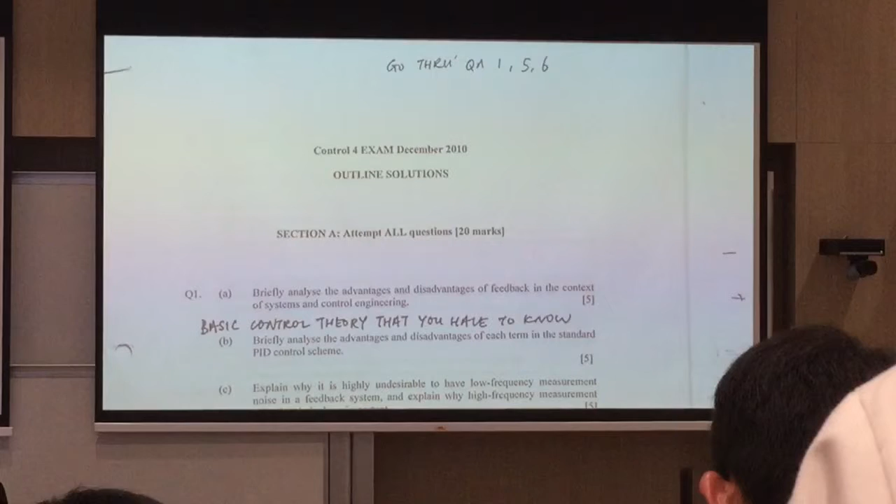Alright, never mind. So for this particular one, which is a sample, I've got questions from some of your friends saying I should go through questions 1, 5, and 6, but others were asking more about questions 2, 3, and 4. As far as you're aware, this course has undergone certain changes since this year, so I'd say 2, 3, and 4 are not really relevant. So ignore 2, 3, and 4.

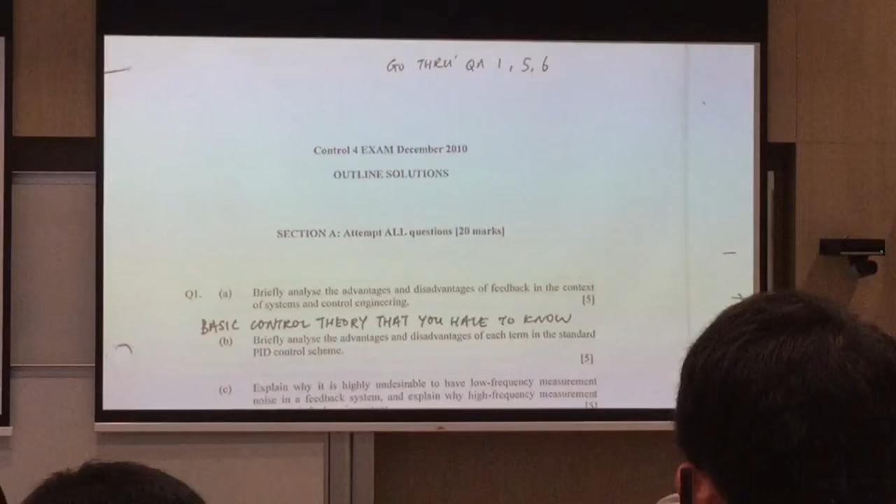So this one, we'll go through questions 1, 5, and 6 because they are still covered in the scope of your course. That's also the reason why it's still included in total — if questions 1, 5, and 6 were also not covered in the scope of the course, we would have left them out. Okay, ready?

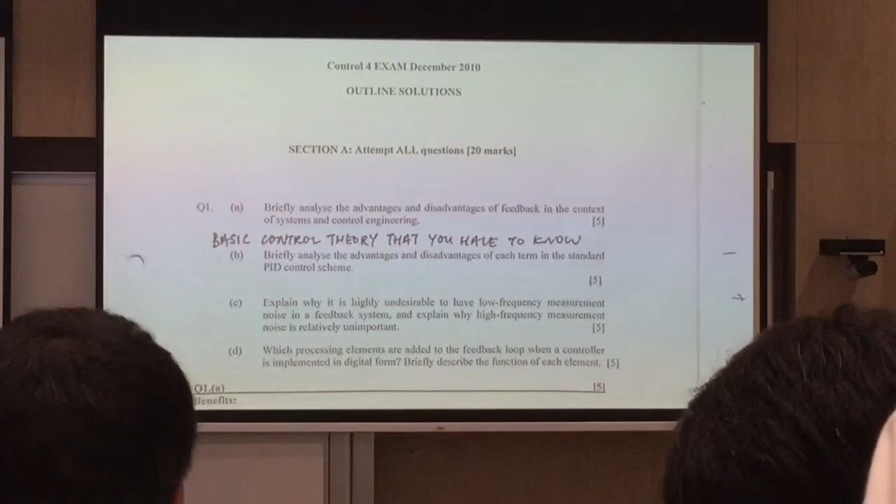Because the solutions are provided, there's no reason for us to spend too much time on it. Okay, question 1: briefly analyze advantages and disadvantages of feedback, in the context of systems and control engineering.

Alright, so this is what you'll get if you've read the notes. It'll say that feedback can help with disturbance rejection and robustness against uncertainty, and so on and so forth. Okay, the answer is there, really no need to go into detail.

For the benefits — I see a lot of chattering. Not interested? Shall we skip it?

Huh? You want to go through this? Oh, because you're giving me feedback that you're not interested, right? So okay, alright, let's move to the disadvantages.

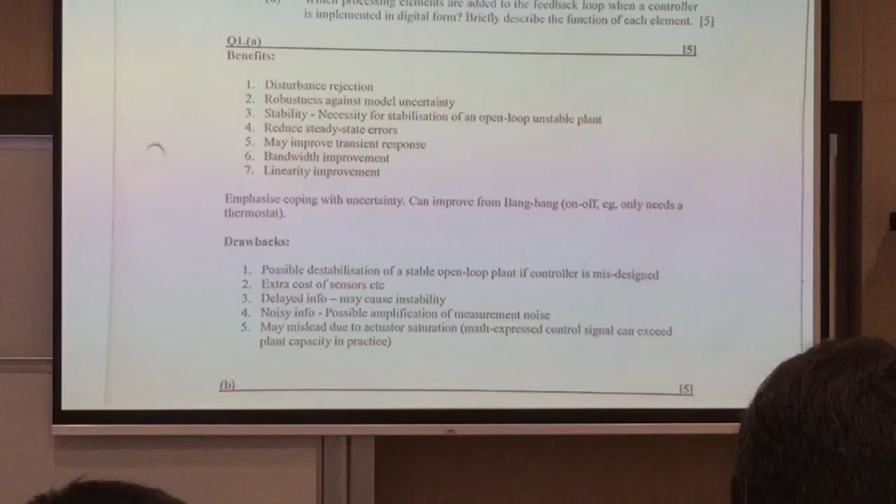Disadvantages — I think it's not really what we put here other than measurement noise, but more like having too high a gain. You may destabilize the system, and you need proper low-noise measurement sensors, etc. So those are the drawbacks.

Okay, part B, which will be more relevant. So I wrote here that question 1 is basic control theory that you have to know. Will this be tested?

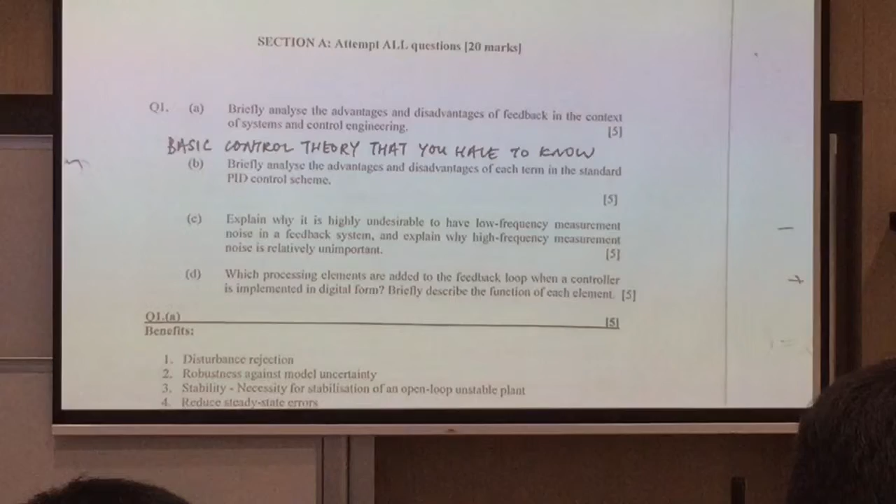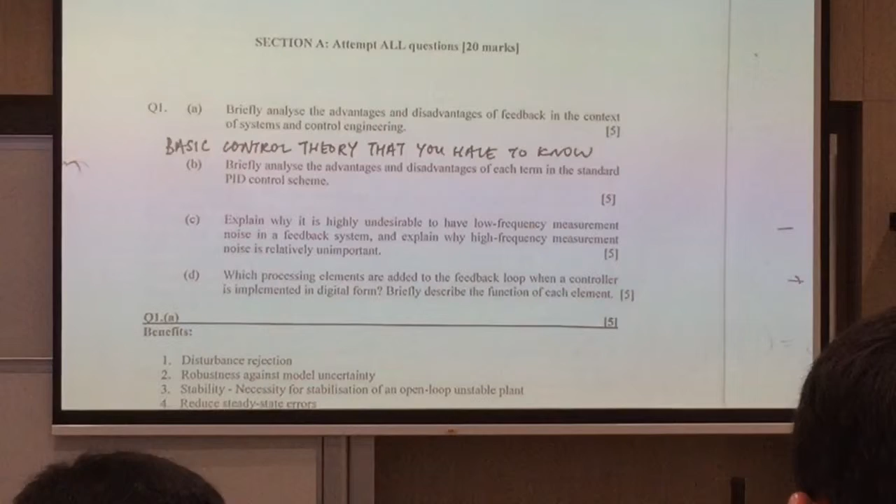Parts D and C, as far as I can remember, were tested in one or two of the past exams. So you still have to know the control theory. As I said, this is a very theoretical matter, it's not all about calculation — there are certain things you have to memorize, especially in the first part of the course.

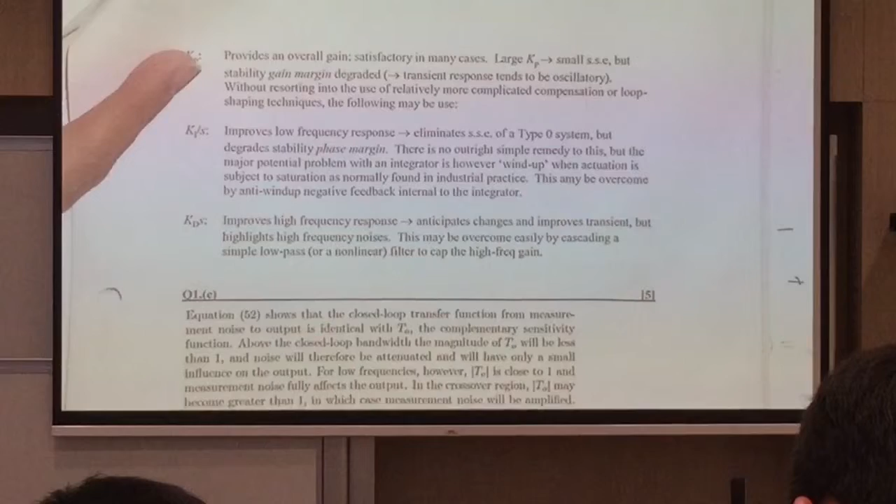So, part B: advantages and disadvantages of each term in the PID control scheme. You have to know there are 3 terms — KP, KI, and KD. KP provides an overall gain. If you have too large a KP, you get a small steady-state error, but the gain margin will be degraded.

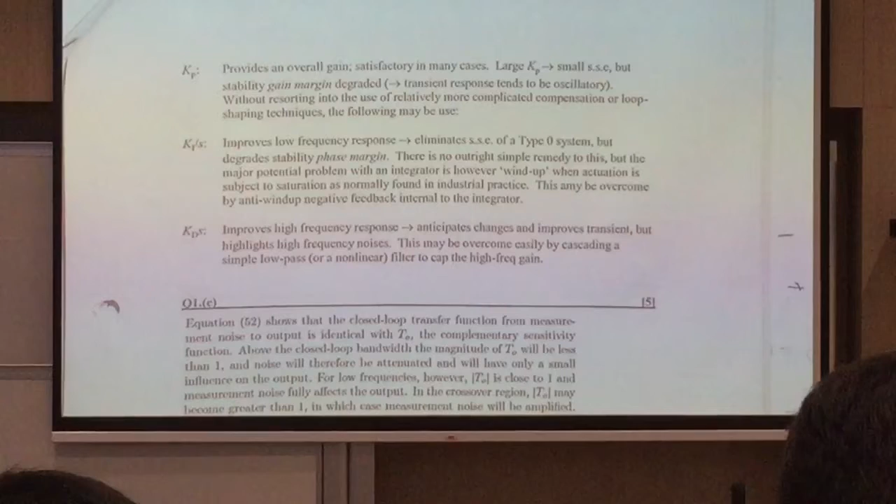Integral gain works on the low frequency response, as we mentioned in lecture, whereas differential gain works on the high frequency response. Integral gain eliminates the steady-state error, bringing it down to 0. But there's a problem with integration — it may end up causing the system to go into saturation, rendering it useless.

Part C: Why is it highly undesirable to have low frequency measurement noise in a feedback system, and why is high frequency measurement noise relatively unimportant? This relates to your sensitivity functions.

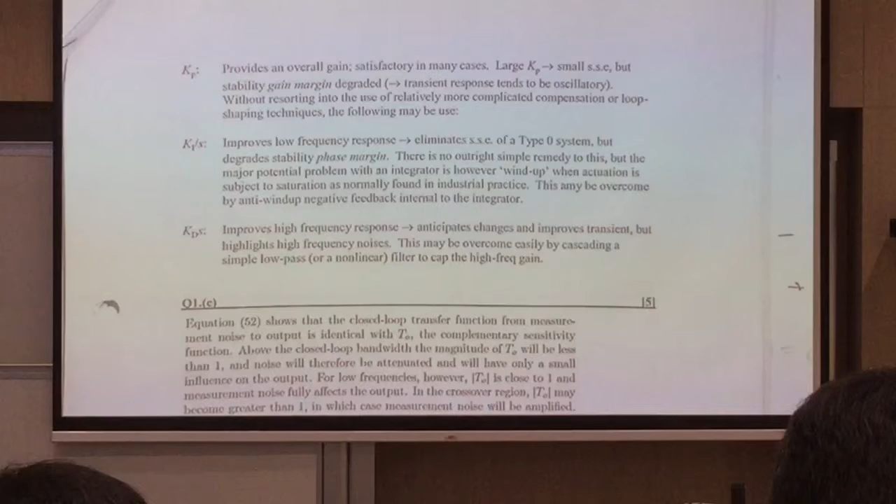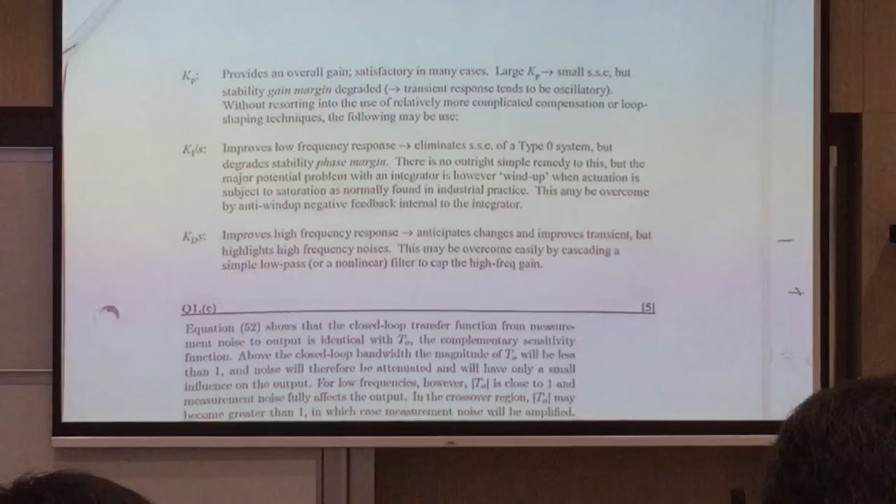So what is the coefficient tied to measurement noise in the output? T, right — the complementary sensitivity. The answer says the closed-loop transfer function from measurement noise to output is T, the complementary sensitivity function.

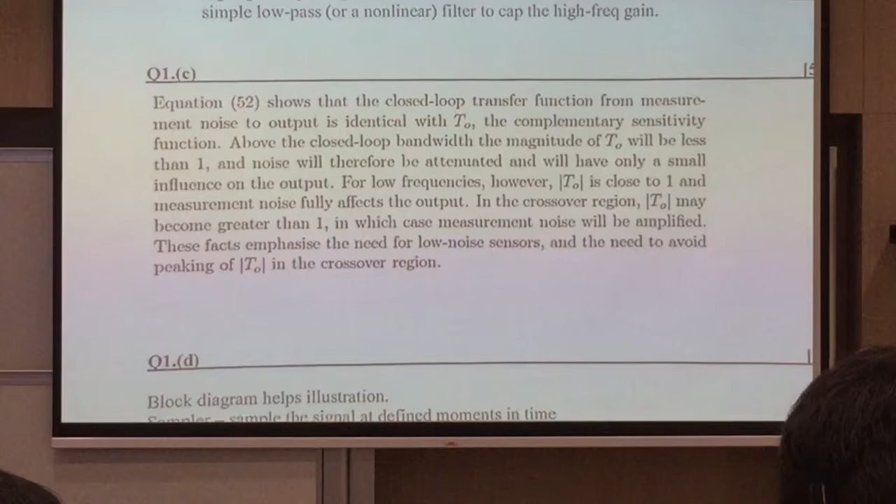If we draw the graph, T starts from 1 at the beginning and goes to 0. So at low frequency, if you have measurement noise, it's multiplied by 1 and reflected in the output. But at high frequencies, the noise is attenuated, so it doesn't reflect on the output. That's why for low frequency, T is close to 1, and measurement noise will reflect in the output.

What about crossover? In the crossover region, if T is greater than 1, you will amplify measurement noise, further emphasizing the need for low noise sensors. This is quite a model question, and this is the model answer.

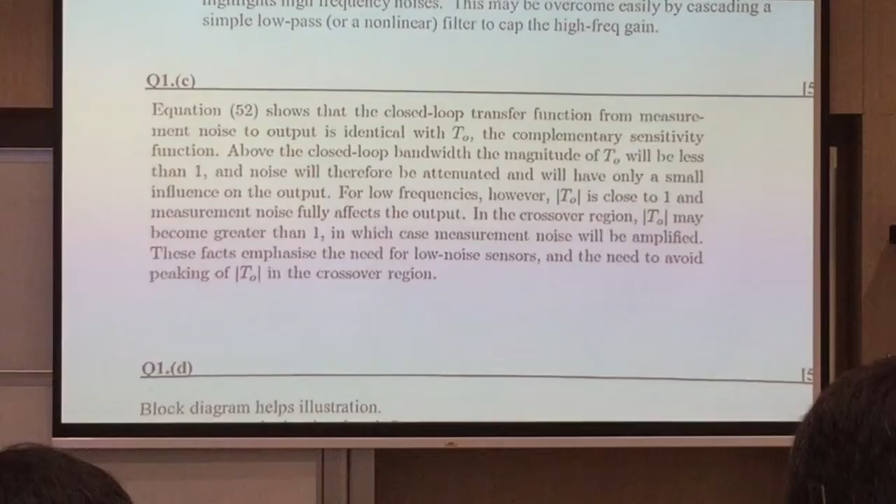Part D: which processing elements are added to the feedback loop when the controller is implemented in digital form? This isn't quite relevant — that portion is more for digital control, so I'm not going to go through this. Okay, that's all for question 1.

Please don't come and ask me about questions 2, 3, and 4. Alright, okay, question 5.

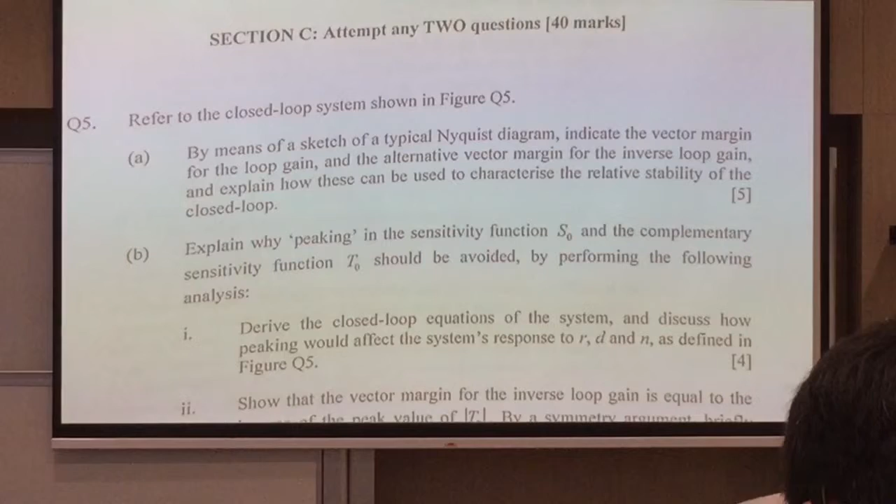Okay, question 5 is a very typical question that we often say. Very typical question, right?

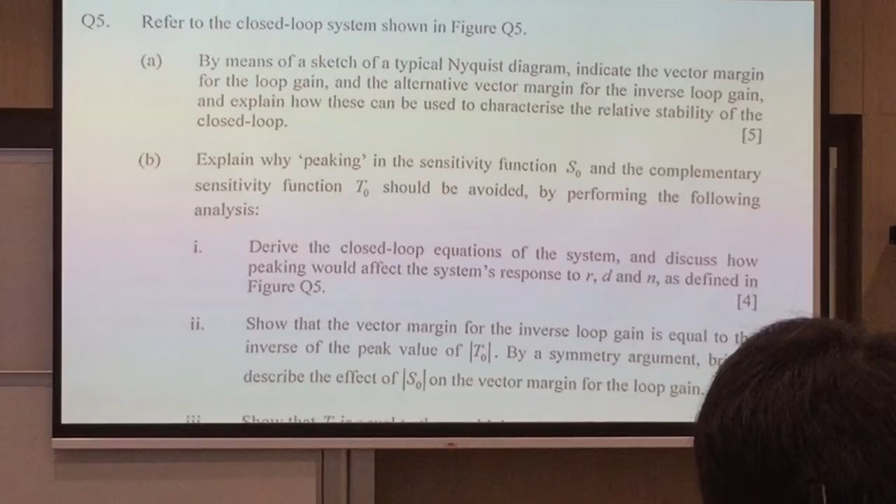Because this diagram, this is what we always draw. We ask for loop gain, so you must tell me that this is L, J omega. We ask you to indicate the vector margin.

A lot of these things are extra. So we're asking for the vector margin. So you draw, right now it's -1 and the nearest point. The distance between -1 and nearest point, tell me that's vector margin.

And then inverse loop gain, so you're supposed to draw, which is not here, but in your solution, you're supposed to draw 1 over L. Inverse loop gain, right? Loop gain is L, J omega. So inverse loop gain, 1 over L. But we don't draw it here, right? But in the exam, you're supposed to draw.

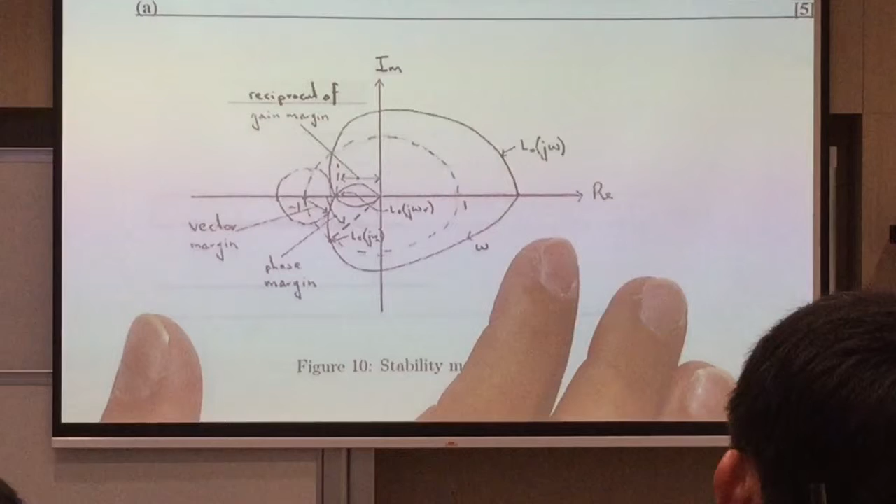So don't just see the answer and then memorize the answer and then think that if I'm going to draw this, I get 2 marks. You didn't get half the mark, because this is not a perfect answer. You answer according to the question, you don't answer according to the solution. So this is what I'm going to tell you.

The question asks for the inverse loop gain. So in your notes, what does the inverse loop gain look like? The shape of a fish. So if you don't know what it looks like, go to your notes. Go to draw a fish.

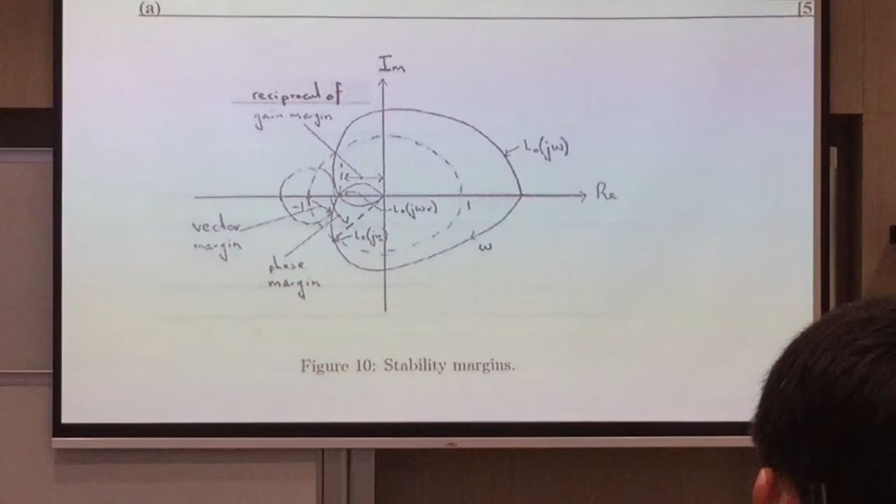And the same thing, indicate the alternative vector margin. So this is RM. For the loop gain, the vector margin is SM. So next figure, you're supposed to draw the inverse, 1 over L, which is shaped like a fish. And you mark from -1 to that 1 over L, and then mark RM. Is that clear? And then explain how this can be used to characterize relative stability of the closed loop.

Sometimes, depending on the question, this solution is not perfect, because this solution is not answering the question. But it's quite obvious without me telling you that this solution is not answering the question. The question didn't ask you for gain margin, it didn't ask you for phase margin. It didn't ask you for the definition of phase and gain margins. So this solution is not answering the question. Please don't just memorize the solution.

That's straightforward. But then, of course, this solution is, if the question has asked you to draw a Nyquist diagram illustrating the gain, the stability margins, and then provide the definition of the stability margins and how they can be used to characterize closed-loop stability, then this is the solution.

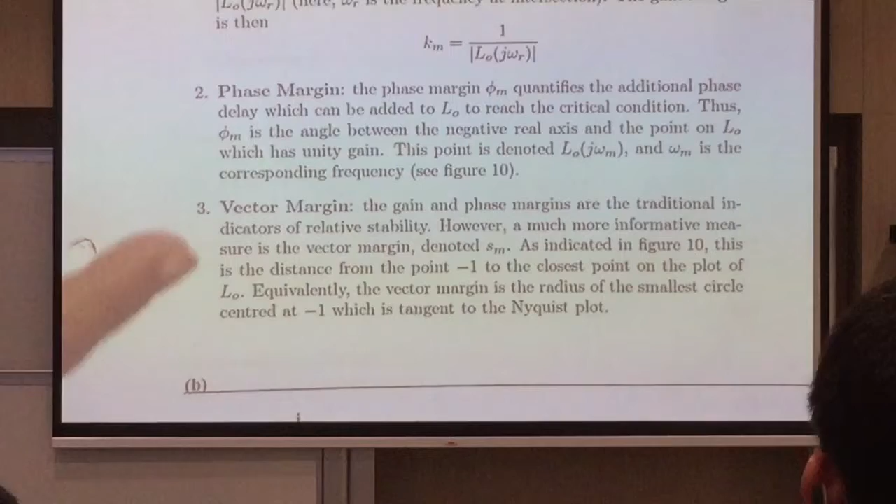So what you're supposed to answer for this is how that can be used to characterize relative stability of closed loop for the vector margin, because they always ask you about vector margin, right? So when you write this part, you say the more informative measure is the vector margin SM, which is the distance from -1 to the closest point to L naught.

And you say that the inverse vector margin RM is the distance from the point -1 to the closest point on plot of 1 over L naught. So that's the answer to this question. Okay, move on, part B.

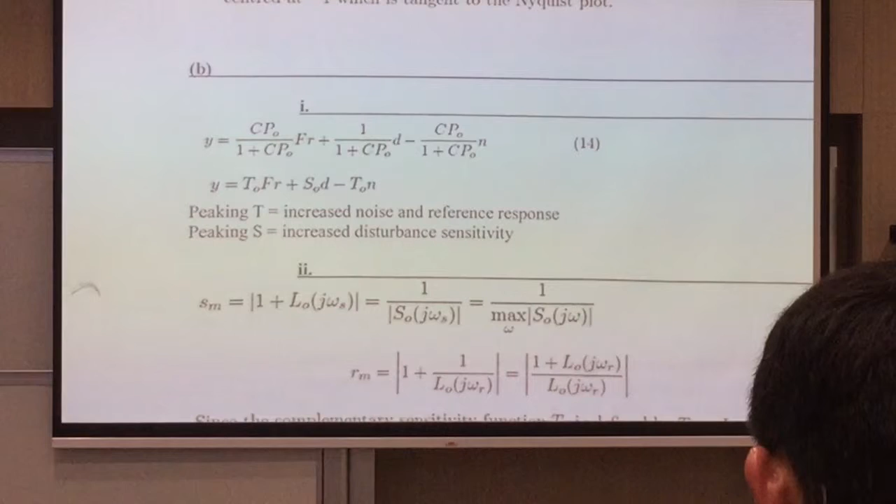Explain why peaking in the sensitivity function S0 and complementary sensitivity function T0 should be avoided by performing the following analysis. Many of you, the minute you read this sentence, jump into explaining why S and T is important and why you want to start peaking and blah blah blah.

But is that the question? Is that the question? The answer is no, this is not the question. Explain why peaking in S0 and T0 should be avoided, it's not the question. You're just supposed to read that. It's just a guidance.

So what you need to do is by performing the following analysis, so the question is in part 1, 2, 3, because these are the sections that are awarded marks. There's no mark here.

Understand this? Okay, so this is English, how you read English. There's no mark here, so you don't have to answer this. You answer part 1, 2, and 3 because there are marks there.

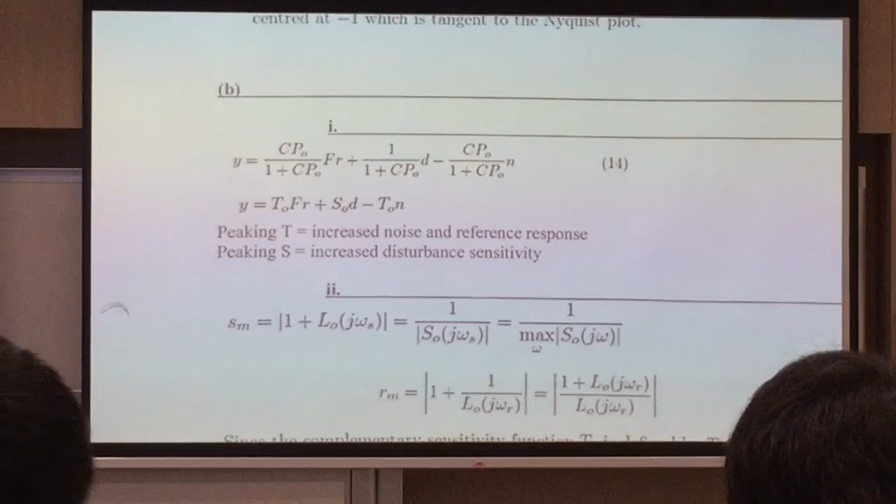This has been tested before, and students were asked why you want to avoid peaking in T and S, why it is important, and to draw all the graphs. But you're not being asked for that here, right? So there are no marks for that. Nothing. Alright, so you should go to part 1, whereby you have 4 marks. So this is where the marks are. Is that clear? Okay, because I don't want to go through the motion of explaining why you did this and that. Why? Waste of ink.

Part 1: derive the closed loop equation of the system. Okay, so basically you write down what is Y equals to, how much is R, how much is D, and how much is N. This is a very important equation, so you should probably memorize it. And discuss how peaking will affect the system's response to R, D, and N as defined in the question.

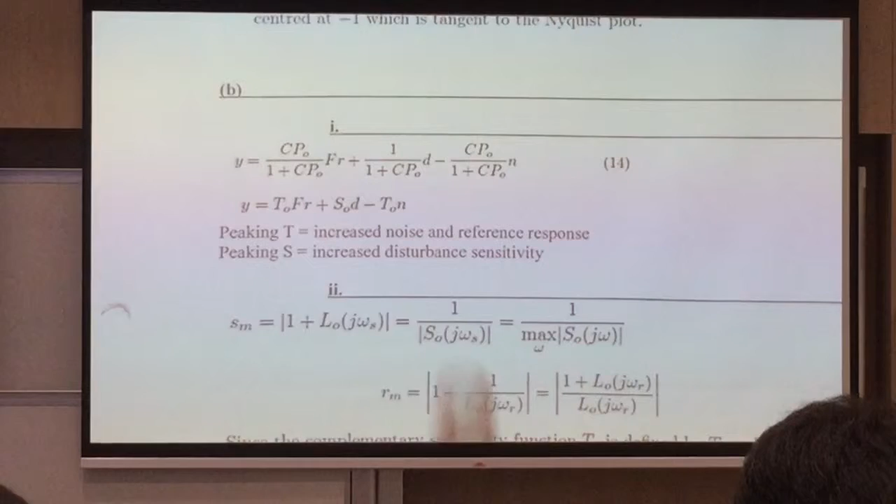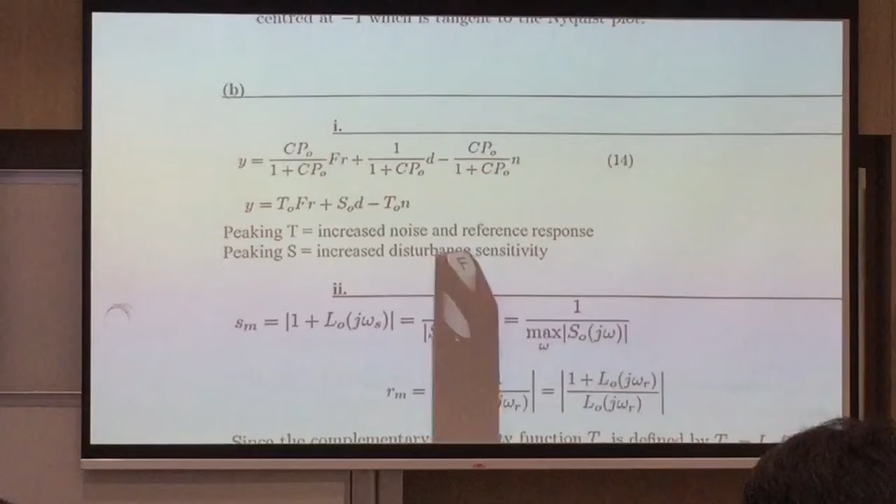So first thing, you write down this equation. Alright, and tell me that this is T, this is F, this is T, so write down this again. And then we'll discuss how peaking will affect the response. So if you are peaking in T, that increases noise and reference response. Peaking in S will increase the disturbance sensitivity. Okay, and then you get 1 mark. Easy to see, marks are awarded 1, 2, 3, 4.

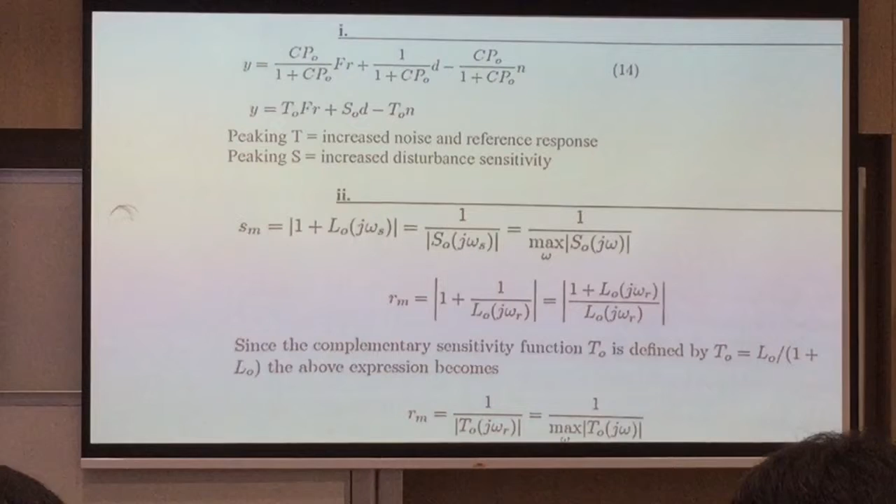Part 2 shows that the vector margin for the inverse loop is equal to the inverse, the peak value of T naught. So basically, show that Rm is equal to 1 over max of T, which we have gone through in the lecture. So if you have taken down notes, you can show that. Okay, that's your problem.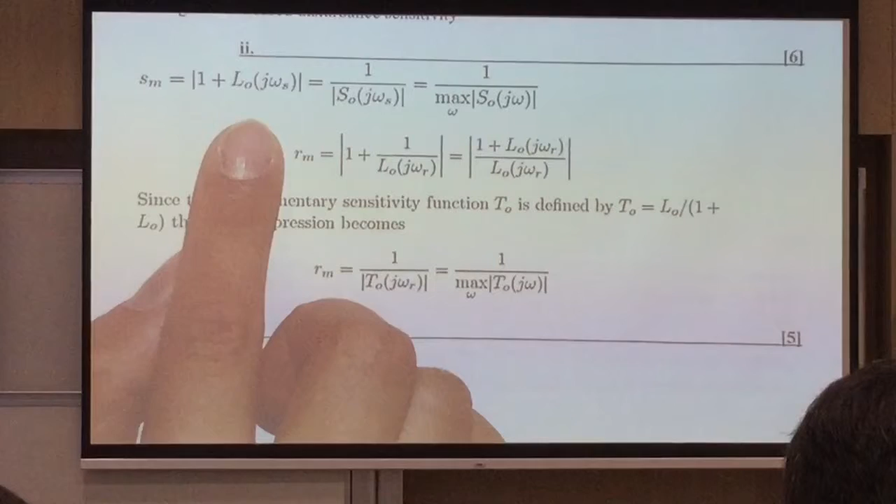This defines Sm. Sm, the vector margin, is the distance from -1 to the nearest point of L naught. So, distance from -1 to the nearest point of L naught is this: magnitude of 1 plus L naught, at J omega s, where omega s is the frequency point at the nearest point. So you can write this: this is 1 plus Cp. L naught is Cp, and S naught is 1 over 1 plus Cp. Correct? So 1 plus Cp will be 1 over S naught. You got that?

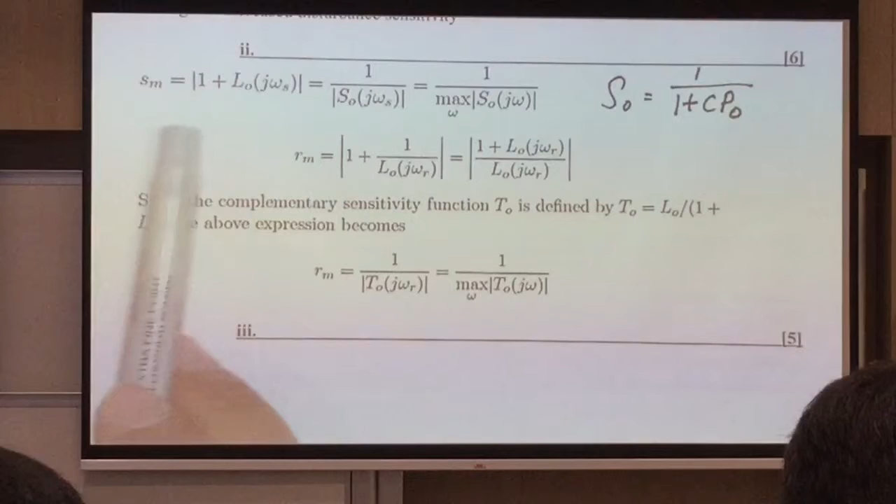S naught is 1 over 1 plus Cp naught, and the definition of Sm is 1 plus Cp naught, so this is 1 over S naught. Got that? And because Sm is the minimum distance, the shortest distance, the closest distance, if you want minimum of Sm, your denominator will be maximum. So this is 1 over max for the particular frequency.

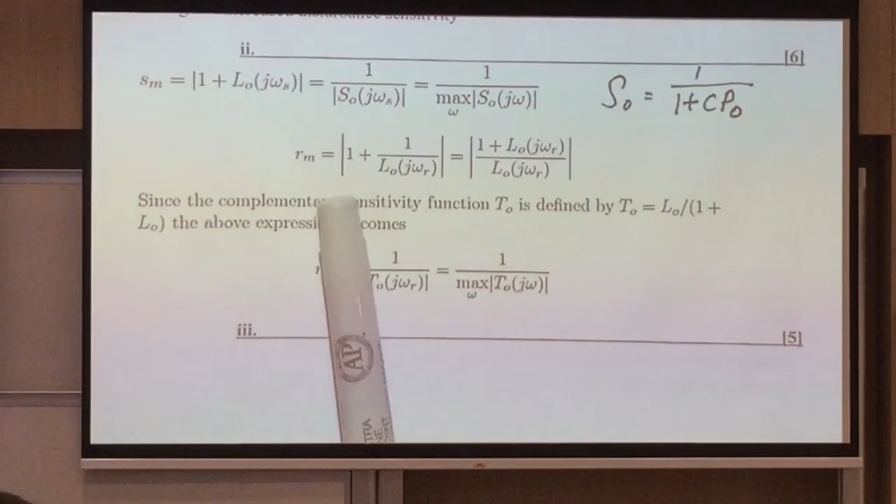Alright, then you move on to Rm. Rm is the distance between -1 and the inverse loop gain, the closest distance between -1 and 1 over L naught. So this magnitude defines distance. And if you work it out, it's 1 plus L naught over L naught. And the definition of T naught is Cp naught over 1 plus Cp naught. So you can see easily that this is the reciprocal of T naught, so this is 1 over T naught.

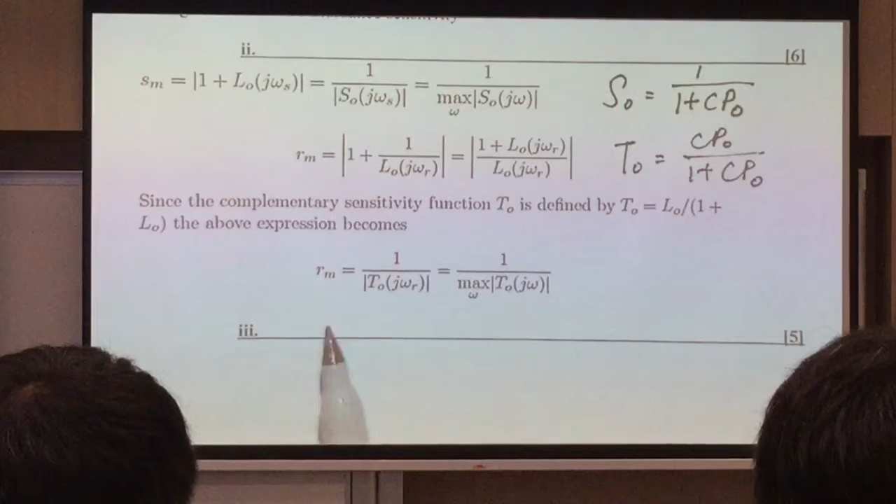So Rm is 1 over magnitude of T naught. Similarly, Rm is the closest distance from -1 to 1 over L naught, so closest meaning minimum. So how do you get minimum of Rm? You get the minimum of Rm from the maximum of the denominator, right? So Rm is 1 over max magnitude of T. And that's all, 6 marks. Easier. Easy? Okay. Part 3.

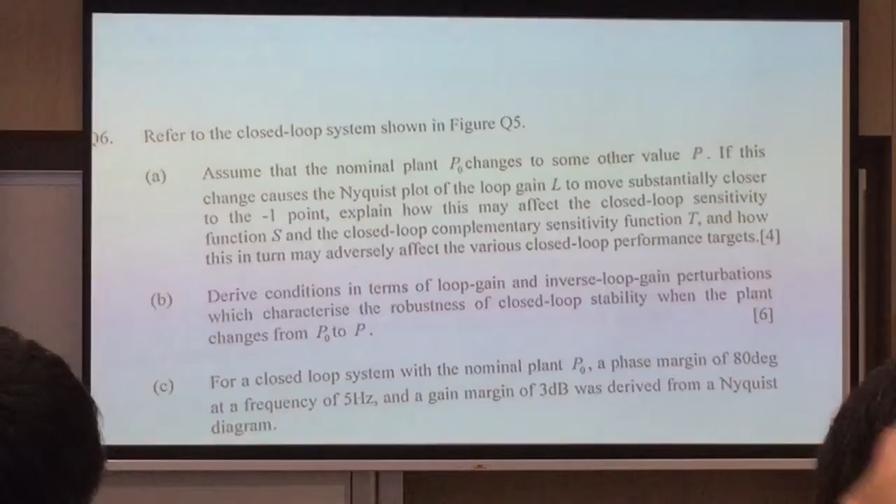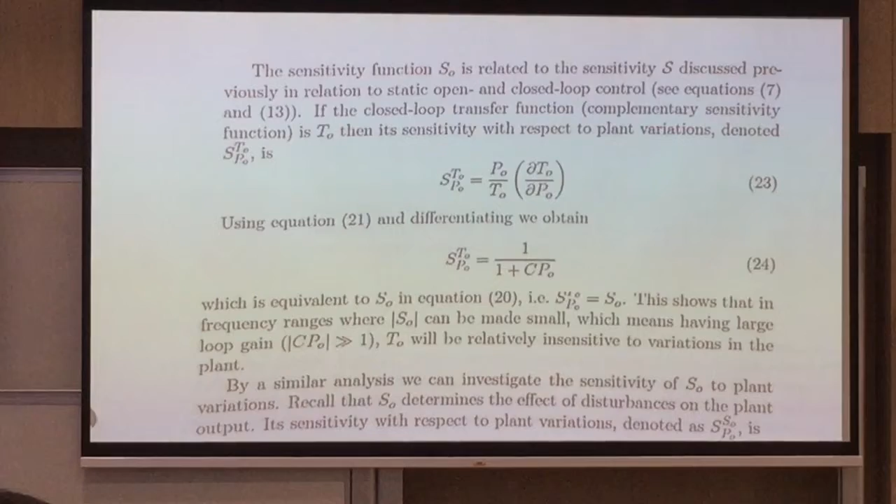Show that delta S naught over delta P naught is T naught, which is something that we have done. Okay, so basically, just write down this, which is over here, right?

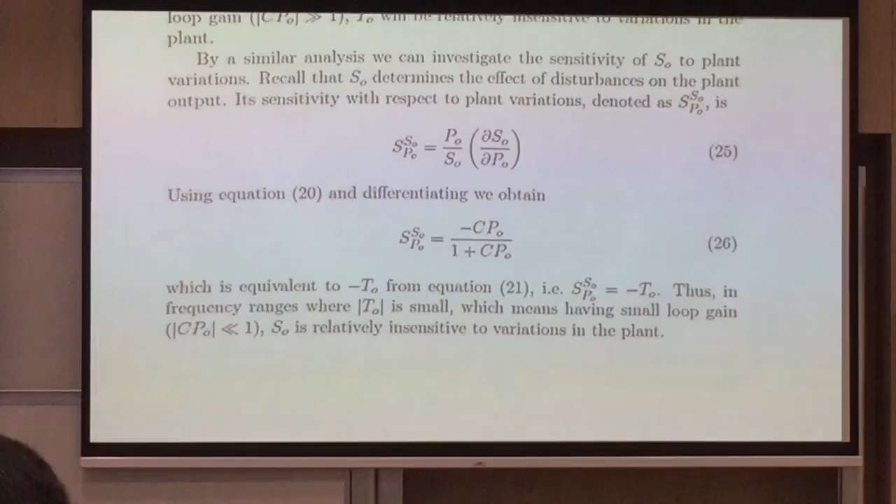This one, okay, so sensitivity of S naught to plant variation. If you read this, the solution is inverse to this question. So the first part of the question says show that T naught is equal to sensitivity of S naught to changes of plant. The answer is here at the bottom, answering the first part of the question.

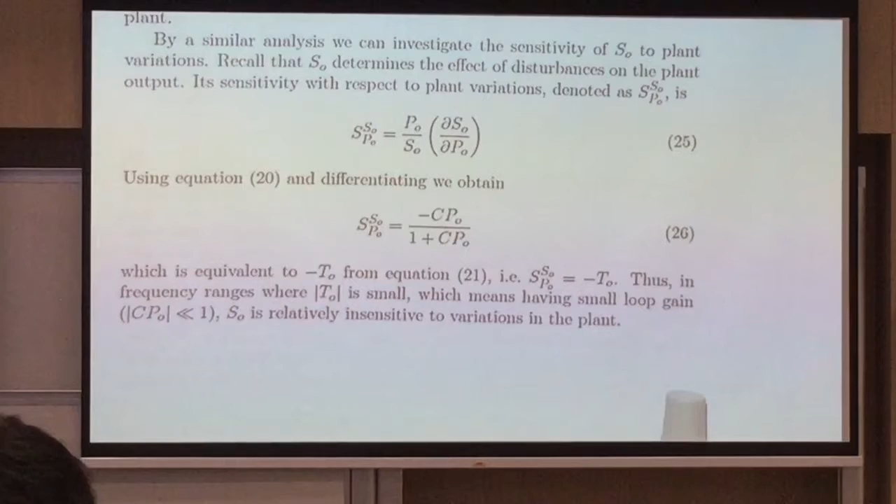This is answering the second part of the question. So don't just memorize the solution. What I'm supposed to write is here for the first part of the question. So you want to investigate sensitivity of S naught to plant variation.

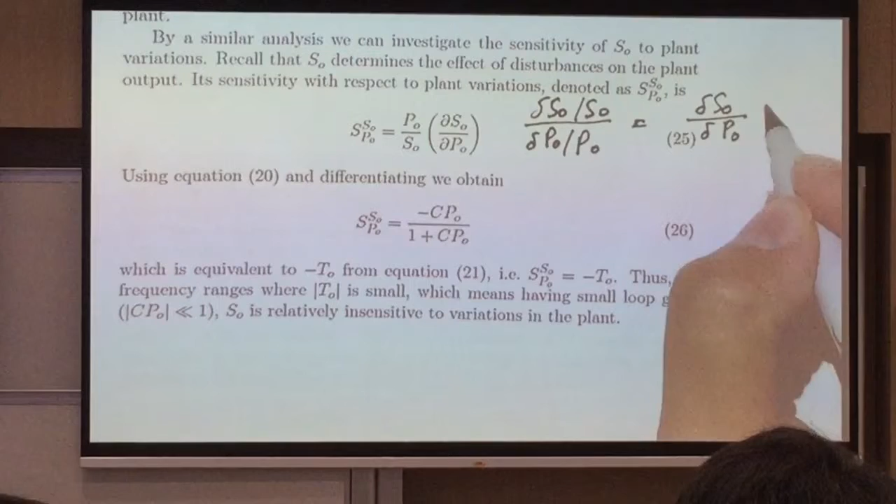So what you do is delta S naught over delta P naught. How do you get this? You're supposed to do delta S naught over S naught, and then delta P naught over P naught. So this is delta S naught over delta P naught times P naught over S naught. Okay? Yes? Right? Yeah?

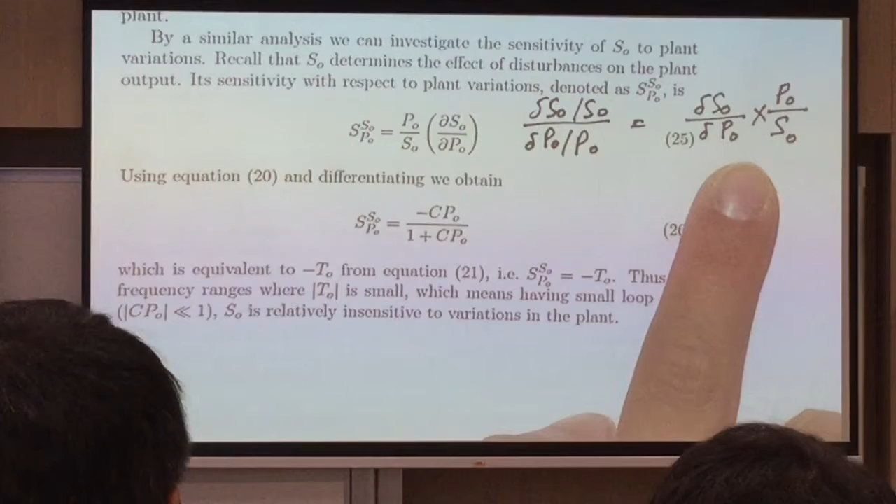Okay, and then if you do this, you work out with this. We have gone through it in the lecture and the tutorial, so I'm not going to go through it again. And show that this is minus CP naught over 1 plus CP naught. You tell me that it's minus CP naught over 1 plus CP naught, if those of you write this.

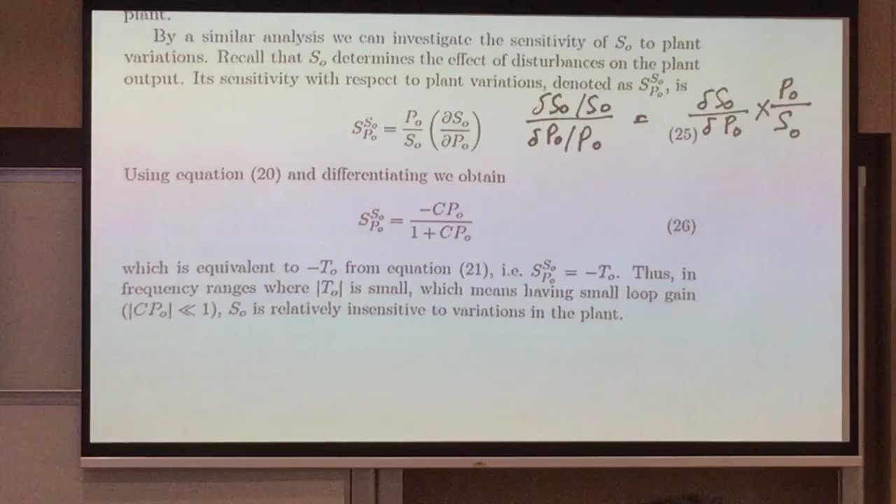You write this, and then you immediately equal it to minus T naught - do you deserve any marks? No, no. Answer is no. You only get 1 mark if you write down this one. But if you write down that this is equal to minus T naught directly, then you don't get any marks at the bottom, alright? You understand?

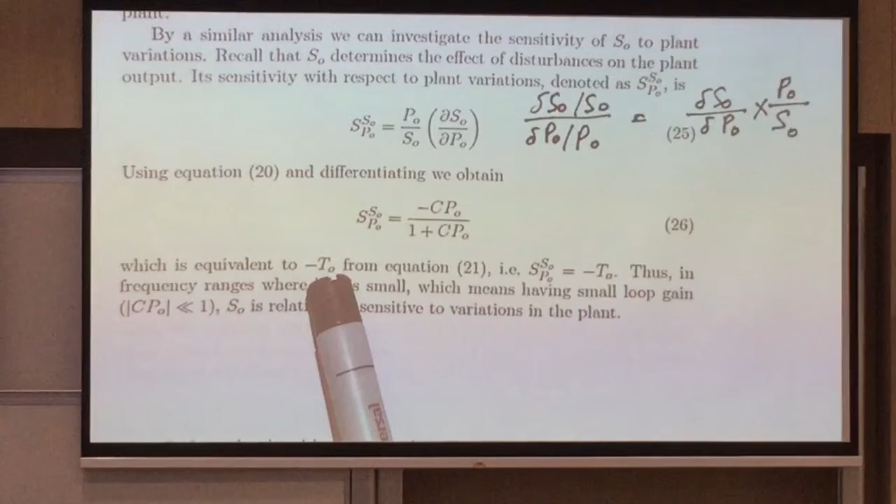You must tell me that this is minus CP naught over 1 plus CP naught, because effectively, if you differentiate, you get everything in C and P, you don't get things in T. You must show me the intermediate steps that lead here and then it equals minus T naught. If you immediately write down this equals minus T naught, I'm sorry. Alright.

Then this part of the solution says in the frequency ranges where T naught is small, which means you have a small gain, S naught is relatively insensitive to variations in the plant. This is something you write if you're asked for it, but in this question you weren't really asked for it. But if you write this, it completes the solution.

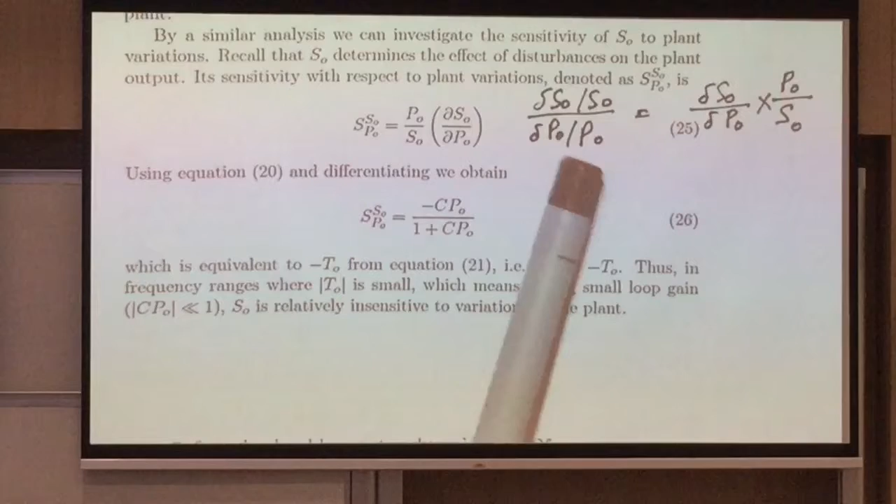So our question would be explain what does it mean in terms of sensitivity analysis. If this is minus T naught, then when T naught is small, in the region, in the frequency range where T naught is small, S naught is relatively insensitive to variations in the plant, because delta S over delta P naught is small. So changes in the plant don't affect S naught.

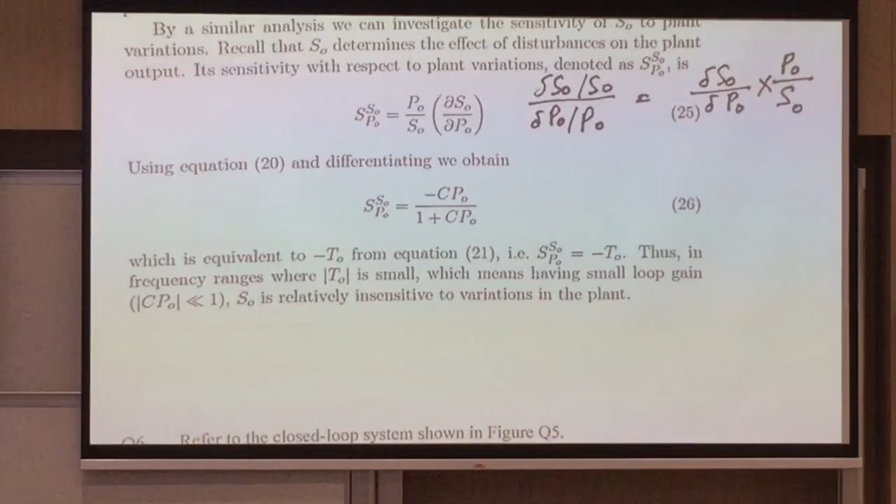Okay, you got that? The next part of the question: by the symmetry argument, describe the effect of S naught on the sensitivity of T naught. So the answer is on top. Instead, you do delta T naught over T naught over delta P naught over P naught. Then you go with delta T naught over delta P naught times P naught over T naught.

Okay, and then you show that this is 1 over 1 plus CP naught, which is equal to S naught. And this says that in frequency ranges when S naught is small, T naught is relatively insensitive to variations of the plant.

So don't just memorize the solution, because that's not answering the question. Okay, alright.

5 plus 6 is 11, plus 4 is 15, plus 5 is 20 marks. Can you score 4 marks? You should have. Otherwise, it's difficult to get an A. You don't score 4 marks, at least for my section.

Okay, we move on to question 6.

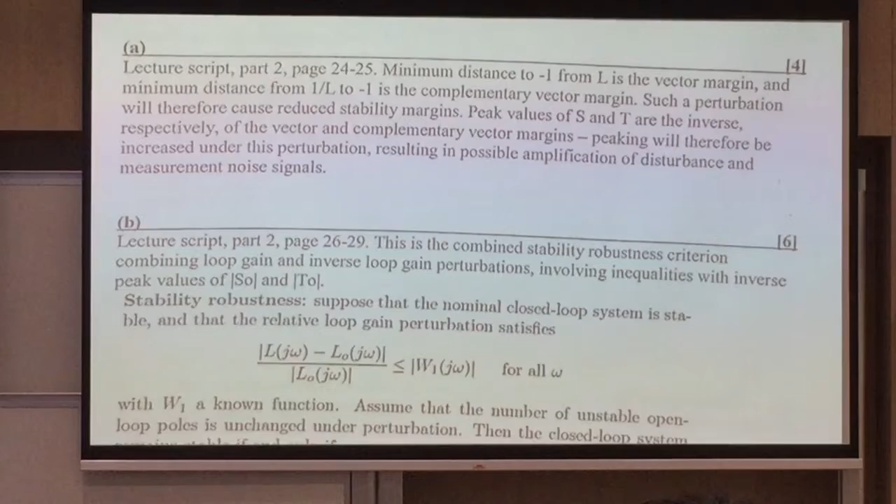Assume that the nominal plant P naught changes to some other value. So there's been a change in the plant. Basically, you change the loop gain from L naught to L. If this change causes the Nyquist plot of the loop gain L naught to move to L, which is closer to the -1 point, explain how this may affect the closed loop sensitivity function S and T, and how this in turn may adversely affect the various performance targets.

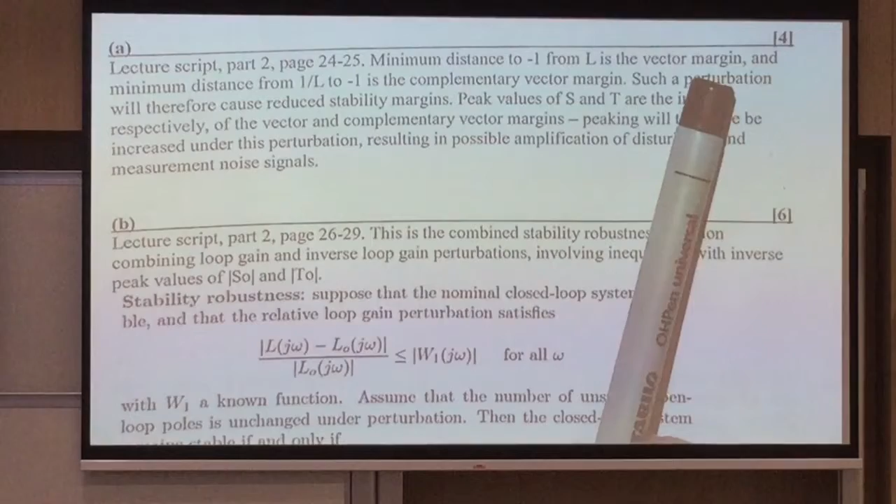So basically it's telling you that L naught has changed to L. How does that affect S and T? When L naught has changed to L, your minimum distance to -1 from L is called the vector margin. And the minimum distance from 1 over L to -1 is the complementary vector margin, so there's SM and RM. So if your L naught has changed to L, SM and RM will be reduced.

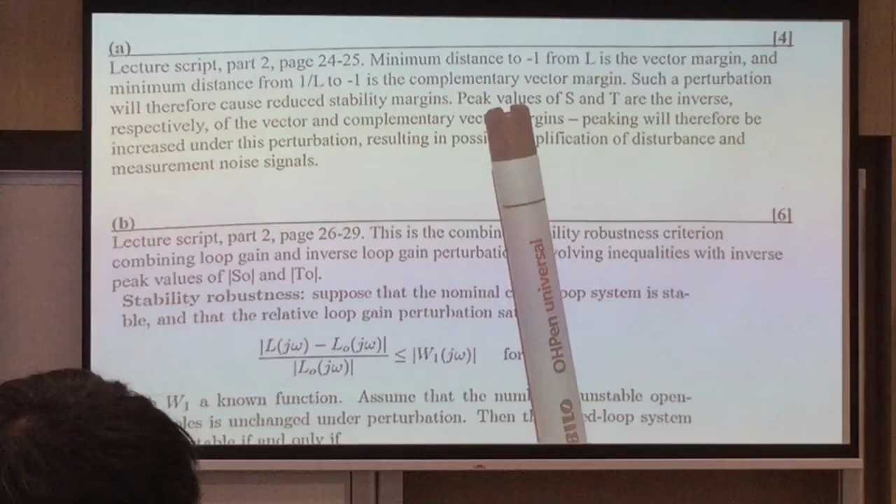And because SM is 1 over max of S naught, and RM is 1 over max of T naught, the peak values of S and T are the inverse of SM and RM. So peaking will then be increased under this perturbation, because if SM and RM are reduced when L naught has changed to L, SM and RM are reduced.

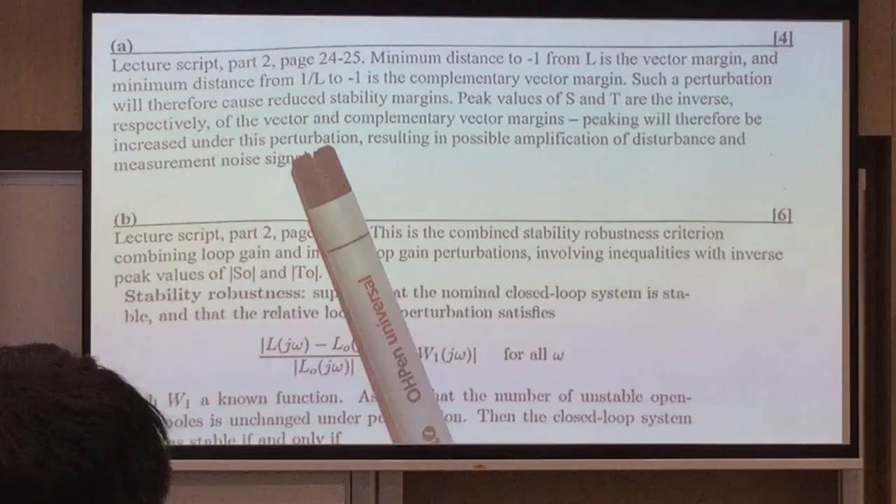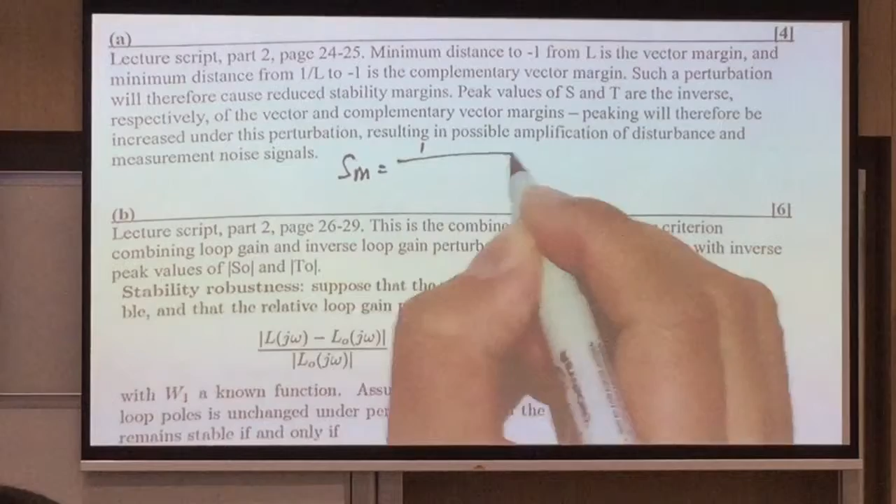So SM is 1 over max of S naught, and RM is 1 over max of T naught. So this question says that L naught has changed to L. And because SM is 1 over max of this, L naught changed to L, SM reduced, RM reduced.

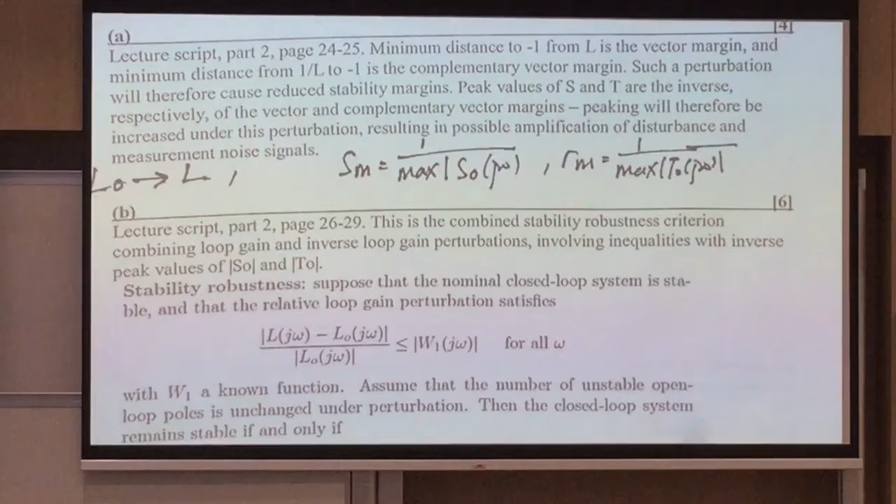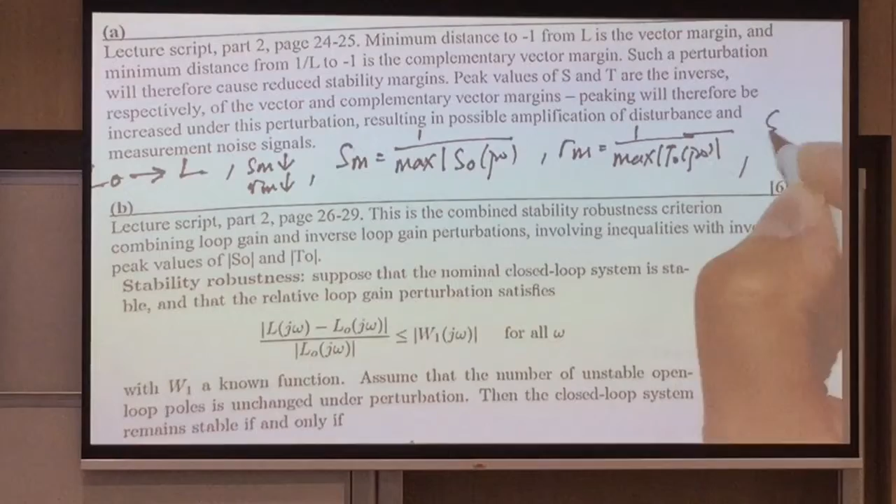SM reduced, RM reduced. SM is 1 over max of this, RM is 1 over max of this. So that's peaking, because this is lower, so this is bigger. This is lower, this is bigger, right? So it tells you that S naught and T naught increase. Yes, so that's peaking.

So there's amplification in disturbance and measurement noise. Make sense? Straightforward, it's just one line like that, but of course this is not what you write for the solution. You write in full complete sentences. You can write the equation and explain why. That's 4 marks - you'll definitely get some marks for it, not all 4 marks. Understand?

Part B. Derive conditions in terms of loop gain and inverse loop gain perturbations, which characterize the robustness of the closed loop stability when the plant changes from P naught to P.

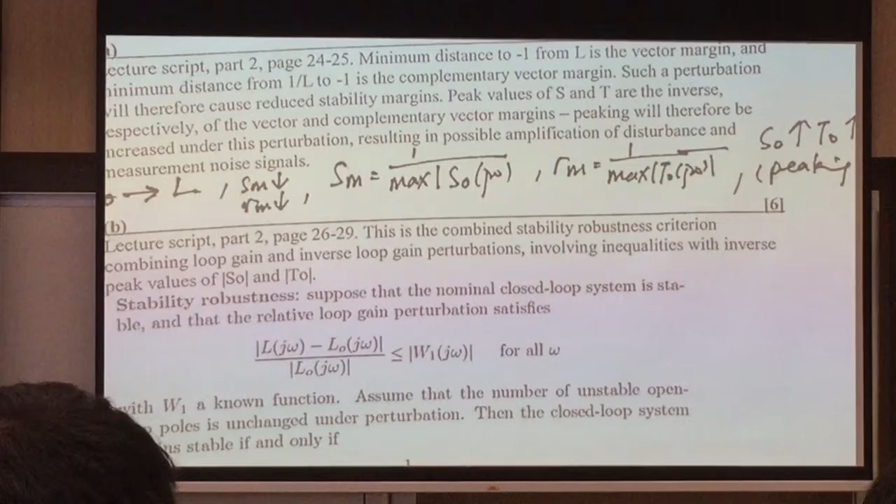Derive conditions - so sometimes we may ask you to derive conditions in terms of loop gain and inverse loop gain perturbation, meaning when L naught has changed to L, and when 1 over L naught has changed to 1 over L. So the question says when L naught has changed to L, and when 1 over L naught has changed to 1 over L. This means there's a perturbation in the loop gain and the inverse loop gain.

Derive conditions that characterize robustness. So derive conditions that characterize robustness - in your lecture, what did you derive that characterizes robustness? Robustness analysis - there's only one criterion here, right? The Doyle's stability criterion.

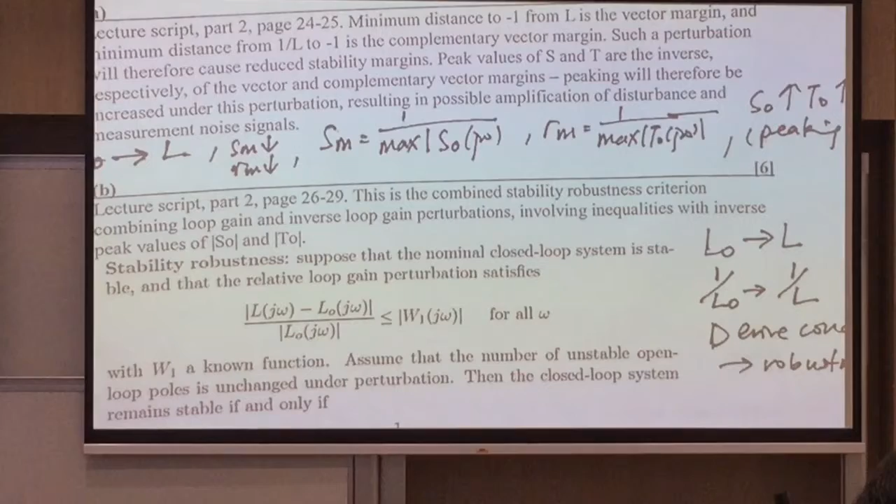So when you read the question, obviously you don't understand it at first, but you need to try to understand it. What the question is asking for is loop gain and inverse loop gain perturbations - meaning if L naught has changed to L and 1 over L naught has changed to 1 over L, derive conditions for robustness. I'm sure many of you, when you read the question, don't understand it, but if you look at this, you understand it. I hope you understand it. So for the robustness condition, there's only one criterion that you have learned in the whole of this course - that's called Doyle's stability criterion.

So part B is asking for Doyle's stability criterion. All you need to do is write down the entire criterion, and that's 6 marks. Sometimes we will ask you to derive necessary and sufficient conditions - same thing, still the Doyle's stability criterion. As long as you see that we mention loop gain and inverse loop gain perturbation, derive necessary and sufficient conditions, and we mention robustness when the plant changes from P naught to P, give us the Doyle's stability criterion. Is that clear?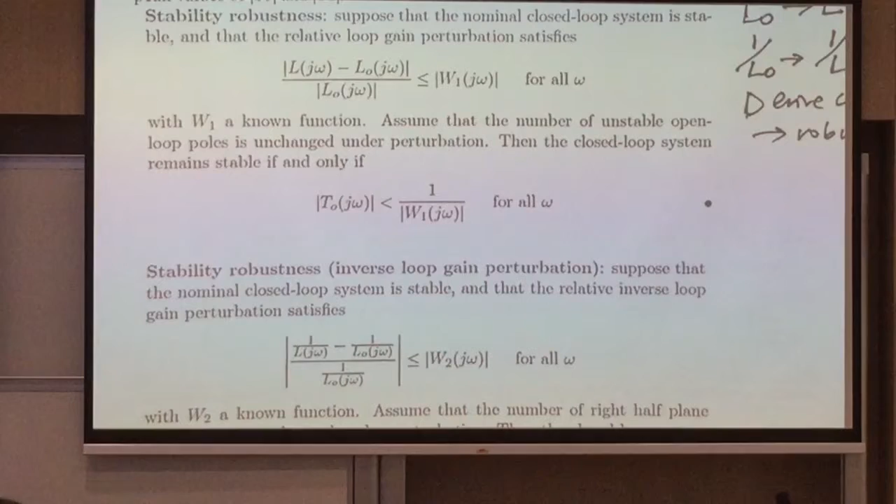Okay, so what is Doyle's stability criterion? Alright, just answer the question. If there's a perturbation from L naught to L, by Doyle's stability criterion, L minus L naught over L naught must be less than or equals to... okay, you wouldn't write W1 immediately.

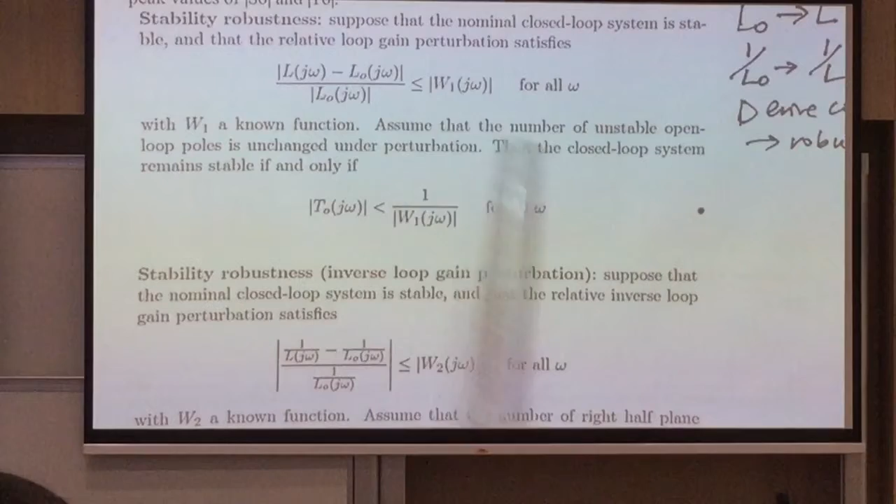Any questions over here?

Okay, so as I said, this is a very theoretical module. There are 3 parts of this module. The first is sensitivity functions and how they relate to stability margins. The second part of this module is on PID controllers and pole placement for polynomials. The third part is on state space and also pole placement with state space. So for the first and second part, it's already very theoretical with a little bit of calculation.

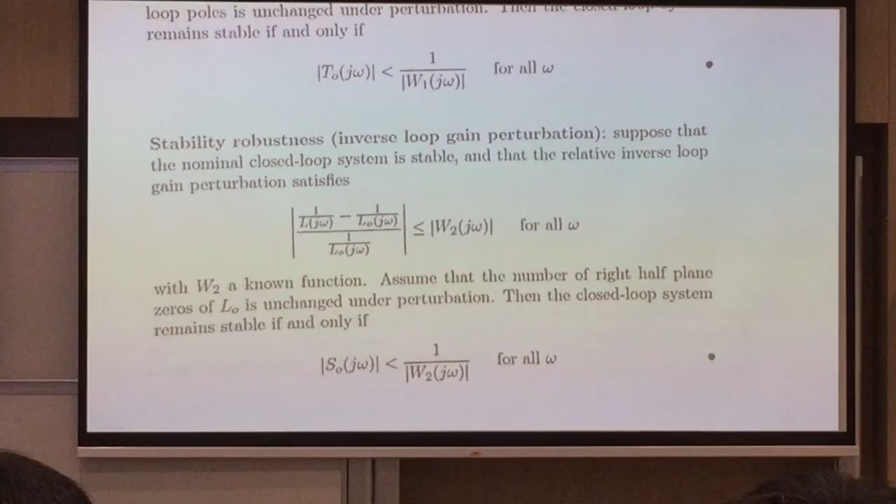So for the first part, when you see a question like this, like question 5 and question 6, there's some memorization you have to do. But you only know what to memorize because we've been telling you over and over again, especially in the tutorial, that these are the basic things you have to memorize.

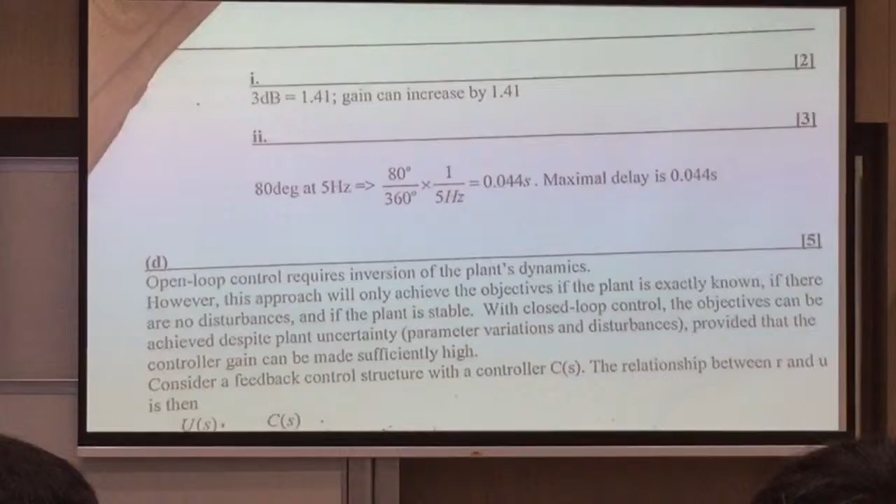So when we go through this in the tutorial, yes? It's in the tutorial. Alright, so what we are asking for, which is actually not the question here. Okay, so that's not a question. The question is this, part 1: by how much can the plant gain increase before the closed loop becomes unstable?

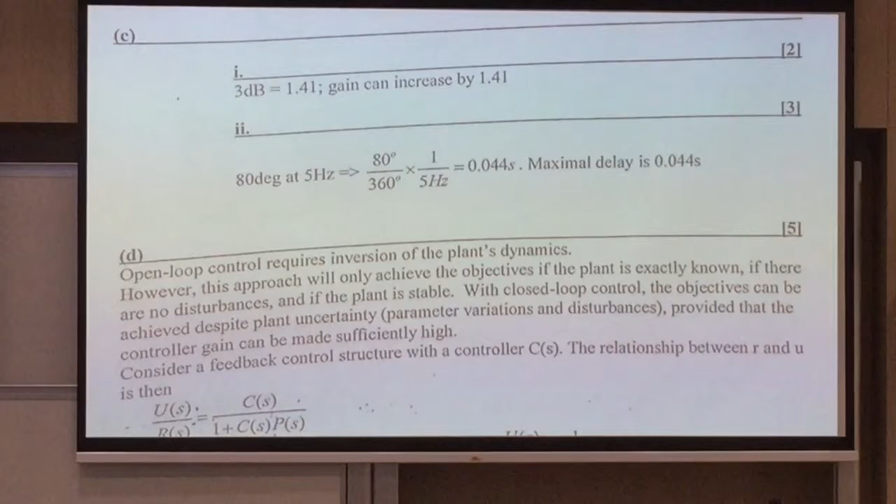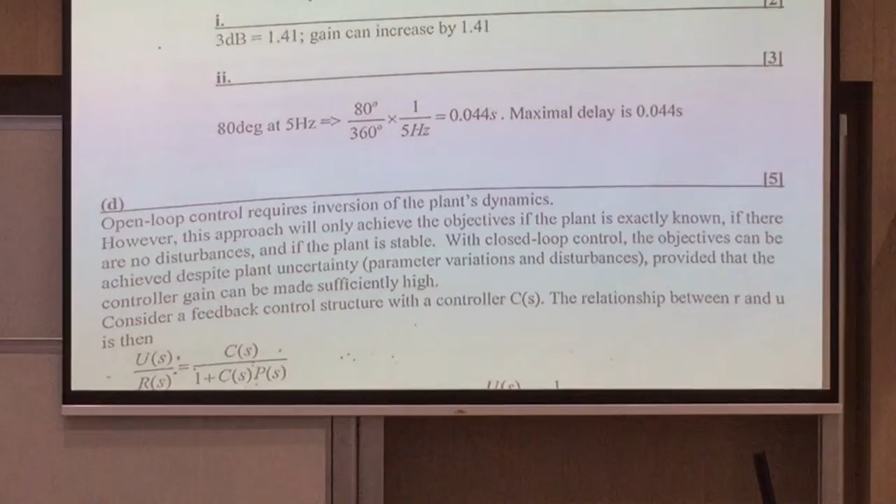So we tell you that the gain margin is 3 dB. So how much can the plant gain increase before it becomes unstable? Let's convert 3 dB to the raw value. So dB means 20 log of x. So 20 log of x is 3 dB. So you calculate what is x. X is 1.41. So for those of you who have Casio or Sharp, make sure you get this.

So answer is the gain can increase by 1.41 before the closed loop becomes unstable. You get 1.41, those who are pressing the calculator. Yes? You get 1.41? I think yeah, if you get 1.41?

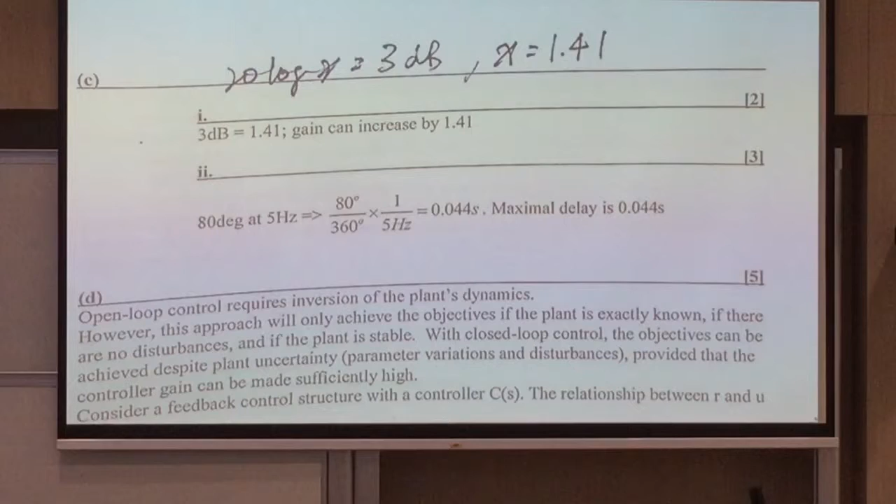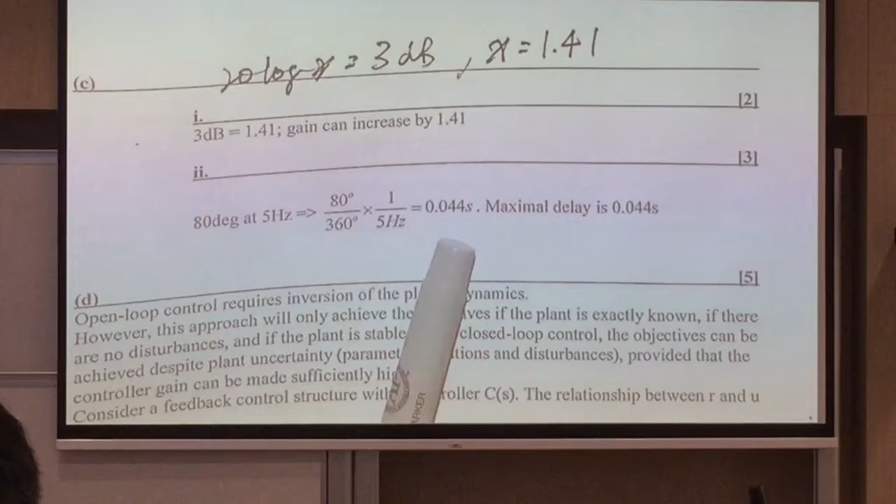Alright, so part 2: what additional delay can be added to the closed loop before stability is lost? We tell you that the phase margin is 80 degrees and the frequency is 5 hertz. So what you do is convert 80 degrees and 5 hertz to time in seconds. So 80 degrees over 360, which is 1 revolution, times the time period. The time period is 1 over 5 hertz. So 80 over 360 times 1 over 5 equals 0.044. So the maximum delay that can be added before the closed loop becomes unstable is 0.044 seconds.

Okay, and that's 3 marks. So can you get 3 marks on this? Yes.